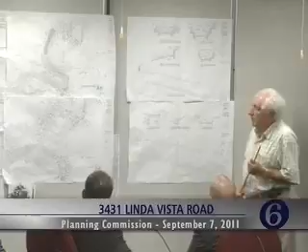We end up with this wall, we don't end up with that flat pad there. Even this wall is, I believe, more than 9 feet high. So for all these reasons, having a 20% driveway ends up with this kind of situation that I don't think is pleasant to see.

This is the basic issue with the driveway. Now, if we have 4 walls, that's another variance, and another variance for more than 1,500 cubic yards of excavation, transporting all this stuff, and not being able to reach where we want to reach. That's so obvious and basic.

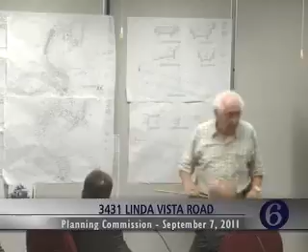If you are going to explain about the fire department situation, then maybe I don't need to speak about that. We talked to the fire department. The reason this hearing was continued was that the fire department wanted to solve this once and for all. We had 2 meetings with Jeff Halpert and Doug Nichols, and in the second meeting, they told us they are okay with this project, and they will have some kind of corrections when we submit for the building permit, which might include more fire-resistant materials or an upgraded sprinkler system, heavy-duty commercial, or whatever it is. These are the things that might solve our issue, and then they don't care for the driveway anymore.

If I have to go to the... that again? I'm sorry.

What did you just say? For the fire department, yes.

We talked to Jeff Halpert and Doug Nichols, and they told us they don't care for the slope of the driveway to be more than 20% anymore. There are other ways of solving the fire issue, like upgrading the fire sprinkler system at the house from a regular system to a heavier, more commercial duty system.

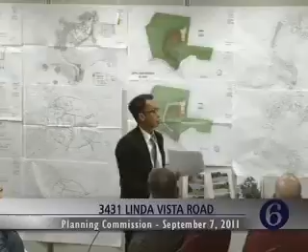The top row, going across, shows drawings that reflect a 20% slope, which is the threshold required by code. As you can see, retaining walls will be required for pretty much the entire length of the driveway. You see starting with two retaining walls on either side, and as you proceed further up, the applicant states that 3 retaining walls would be necessary on one side and 2 on the other.

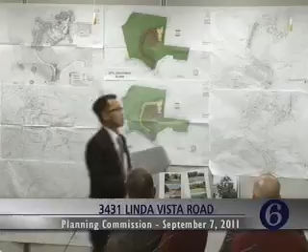However, requiring a 20% slope means grading or cutting further into the existing driveway. What you end up with at the top, where it meets the existing pad, is illustrated here: because of the change in slope for the 20% driveway, you actually end up about 9 feet below the existing flat pad. So this option would not work because it defeats the whole purpose of getting to the pad and the garage, since the 20% driveway ends up below the existing flat pad.

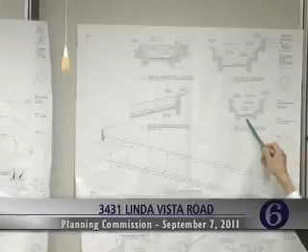These other drawings show section cuts through various points along the driveway. This one shows, again, 3 retaining walls on one side and 2 on the other. But at the very least, you will find 2 walls on either side along the driveway. This is the 20% version.

Now, in order to further develop this 20% option, what essentially would need to happen, in discussion with the engineering department, is the applicant would need to conduct further excavation or grading of the site. According to the new calculation, over 6,000 cubic yards of earth would have to be graded in order to accommodate the 20% option.

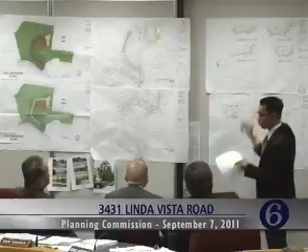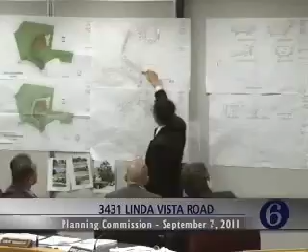This is to account for not only overgrading on the side to build a retaining wall, but to solve this break, this roughly 9-foot difference between the bottom of the driveway at the top and the existing pad. You'd have to grade beyond the existing driveway, because the lower the slope, the longer the distance you need to make up for it to meet the pad at the top. Given the current condition, this driveway may have to veer off the existing path to make the distance, or be extended further. So you'd have to grade and rearrange or reorient the house or garage, or some combination, and that may or may not work.

So at least that'll be part of where the garage is and where they drive up to the house. The house could be at a higher elevation, but they're talking about getting access to the carport or car garage, and the patio area there. You need to excavate, so that 6,000 cubic yard figure actually includes regrading the existing pad and also grading the driveway to 20%.

Now, below are the drawings for the 25% driveway slope as proposed by the applicant. Here you see that two retaining walls will be proposed at the beginning of the driveway, reflected in these two sections. The height of the retaining walls ranges from 2.5 to 3 feet. As you can see, side by side, there's a significant difference between the two options. In addition to the amount of grading, this option would require 1,570 cubic yards as total grading, and the top option is 6,294 cubic yards.

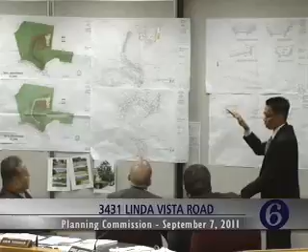That's the result of the additional grading. And who knows, in order to solve this issue with the elevation change, additional grading on top of that could be required if this option is further explored.

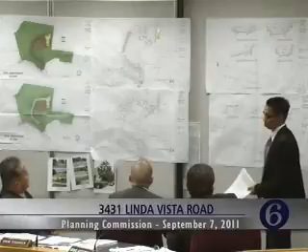Can I ask staff a question? Are you finished with your presentation? No. I have more to add.

Please continue. While the option to provide a driveway slope that meets the zoning code provision exists, new visual and aesthetic impacts would be created as a result. These impacts would be caused by additional grading, as I stated earlier, of the lot, and the need to construct high retaining walls. These impacts in general are contrary to the overall intent of the hillside design guidelines in preserving the natural features of the lot to the extent possible.

A 20% driveway slope in comparison to a 25% slope would provide a level of ease, and I agree with the planning hearing officer decision in accessing the property. However, the difference between a 20% slope and a 25% slope may not, to the untrained eye, be visually noticeable. On the other hand, high retaining walls, particularly those exceeding the height limit, would be easily noticeable and visually obtrusive to the surrounding area, as well as to the owners having to navigate this long, winding driveway with two, three, or a series of retaining walls on either side, creating an almost tunnel-like approach as you proceed up the property.

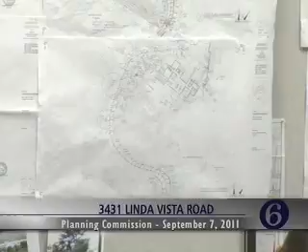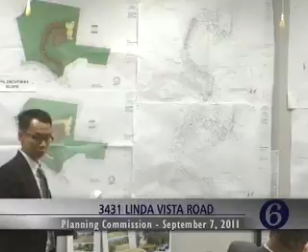In addition, the applicant is proposing to construct a retaining wall along the eastern portion of the property. In assessing and analyzing this project, I believe that was not necessary. This retaining wall would require additional grading and would also subject several pine trees to removal. Based on the scope of work, a condition was placed requiring that wall to be retained as-is and not go through with the proposed grading and retaining wall. There were other conditions.

The building should be pushed back away from the edges of the building pad on the southern and northern portions. Again, oak tree number 20, the biggest tree on the lot, should be preserved and not removed. Pushing the building back from the edge of the pad will help protect this tree during and after construction. The proposed retaining wall along the eastern edge of the building pad does not appear necessary for site preparation or construction and should be eliminated.

The trash enclosure area should be relocated to another area of the pad to eliminate the need to construct unnecessary retaining walls and to save the existing pine trees. Two other conditions: any changes to the site would require the arborist of record to review the changes, and design review approval shall be obtained prior to issuance of any development permits.

So the point I'm trying to make is that when I came to my conclusion, it wasn't without stipulations to further improve this project.